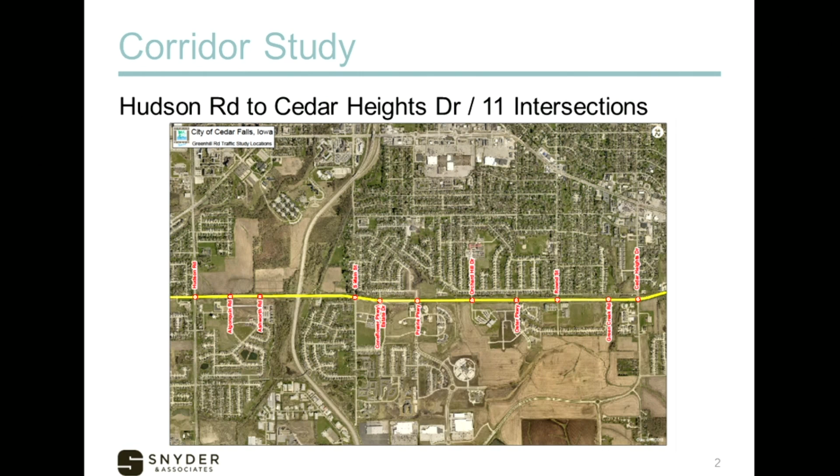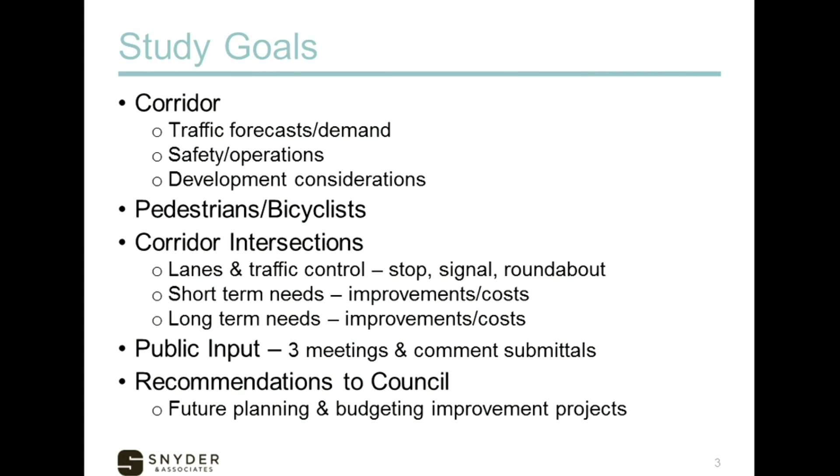Essentially some of the things John mentioned, but what we're looking at with the corridor and the goals, we're just trying to see where things are going. It's been around for quite a while, getting close to 30 years in age now, and trying to decide what the next step of evolution is for the corridor. We're looking at traffic forecasts, safety is always paramount for us, all the different modes, the complete streets, addressing any pedestrian and bicyclist needs, but also trying to give you long-term recommendations for the next steps for the corridor, to help with planning and budgeting.

Some of the main things we looked at is why are we here, why are we doing this, in the sense of community growth and the land use changes in the area. A lot of the area to the north has been there for quite some time. The area to the south is really taking off now in the Pinnacle Prairie area, and how that's impacting the way intersections function and operate for the neighbors out there.

And again, coming back to those budgeting and funding issues as we talk about what types of things are needed in the long term.

The public input process, we had a tremendous opportunity out there with 3 public meetings in which neighbors were invited in. It worked quite well. We were able to provide them with presentations at the meetings to try to give them a summary of information. It was always a lot of information, a lot to ask of everybody, like what we're doing tonight, but we gave a lot of information to them.

And then through that process, we also had open discussion at tables, large aerials, maps, things they could take a look at. We tried to get a lot of feedback and comments from them, realizing we weren't jumping out of the gate with designing anything yet. We're just really talking about what we think is needed at the intersections and how we take steps forward.

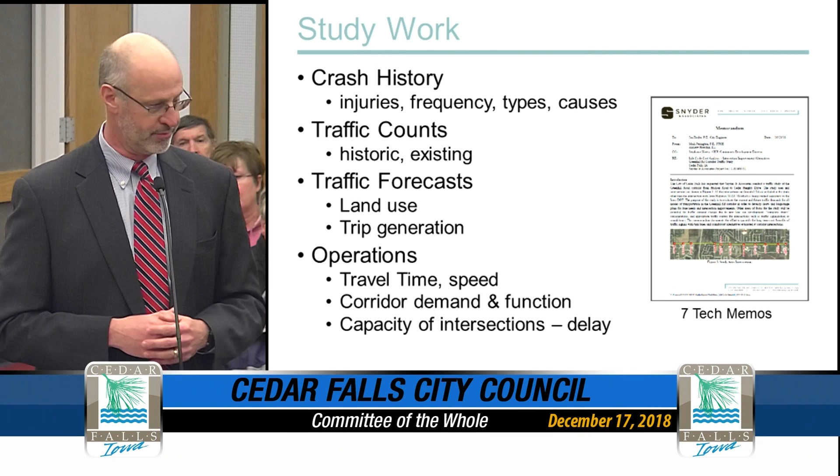Changes were made down there that I'm sure you've all driven through, with the lane elimination — you move over and you got left turn lanes in there. The good news is it was a tremendous help in that there's been 0 crashes out at Rownd since those changes were made. The trick is that's kind of an interim type improvement, because over time, as the road gets busier, having the single lane, the merging, can start to create some conflict out there.

But the key point with all of it is that there's very limited injuries, which is a very good thing — very limited number of injuries out there in the corridor, and for the most part, the rate, like I say, what's going on is fairly low.

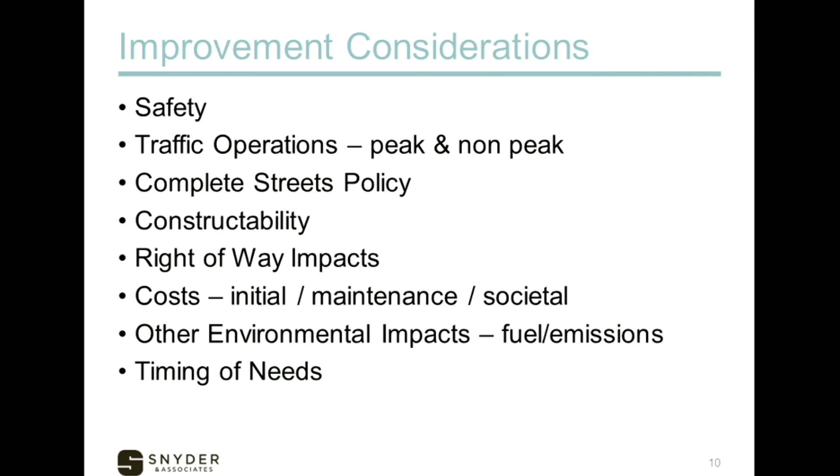When we started looking at improvements out there, number one is safety. We always want to start from that point and ask ourselves what we need to make things as safe as possible. Even though our crash rate isn't that bad, it's still a very paramount part of our decision making. Then we look at other things: traffic in the peak hour versus non-peak times, the city's adopted complete streets policy, right-of-way impacts, and costs.

A key thing we did in this study, which you've seen in some other things with university decisions, was to really try to look at more of the overall costs related to the project—not just the construction costs of an improvement at an intersection, but the costs to the public, how that intersection operates and functions over time. So we put together more of a total dollar estimate when we look at it.

And then we did put a little bit of information into it as best we could with the timing of the needs, when we thought changes might be necessary.

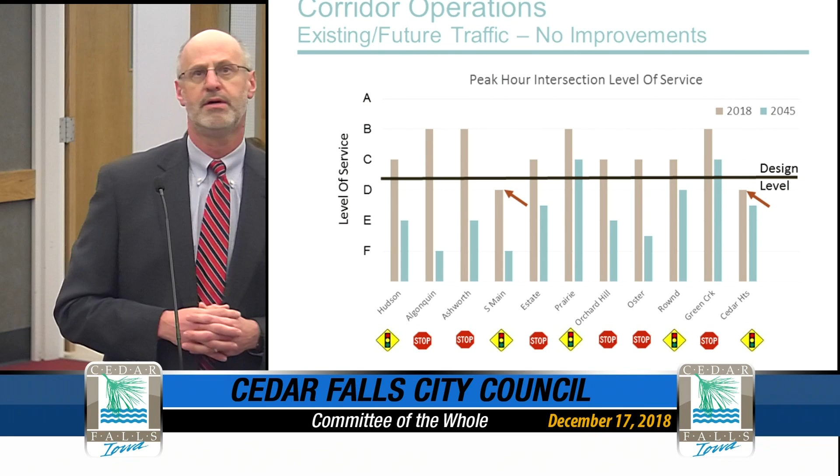So this next chart we're looking at is the corridor operations. Again, you've had us traffic folks up here before speaking to you about level of service, where we give a grade to an intersection of how it works, A to F. As you remember, A is great, F is not working well.

The black line across the middle of the chart is what we look at as that design level. D is when the volume of demand going through an intersection equals the ability of that intersection to handle it. Usually we're trying to aim for something a little bit above that when we design an intersection to operate, so that's why you see it set between D and C.

The point is you look at all the intersections across, and we put the symbol at the bottom to remind you what's a signal versus a stop sign on the side street. Looking at today's traffic, South Main and Cedar Heights tend to operate right at that point where the volume to capacity ratio is getting pretty equal—and that's during the peak hour.

It's not like that during a lot of the other hours of the day, but during that peak time—which is how a lot of the citizenry will judge some of the intersections, since those are the busiest times when people are driving through—you see two intersections that are a little below, but the others are right around that C-B area.

Now, when you look at the blue bar for each intersection, that's 2045. So that's if we generate more traffic out of all these land uses that we think are going to happen. What happens to the intersection if we don't make any changes, everything's just as it is today? How would it operate if that increased demand would occur at the intersection? As you might expect, a lot of those blue lines will go down because the demand goes way up at the intersection. And if you don't make any changes, no lanes, no signals, no roundabouts, anything, it will deteriorate.

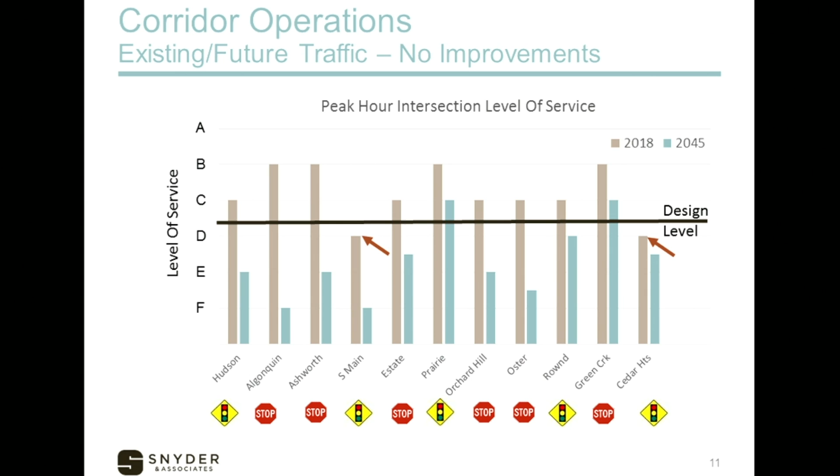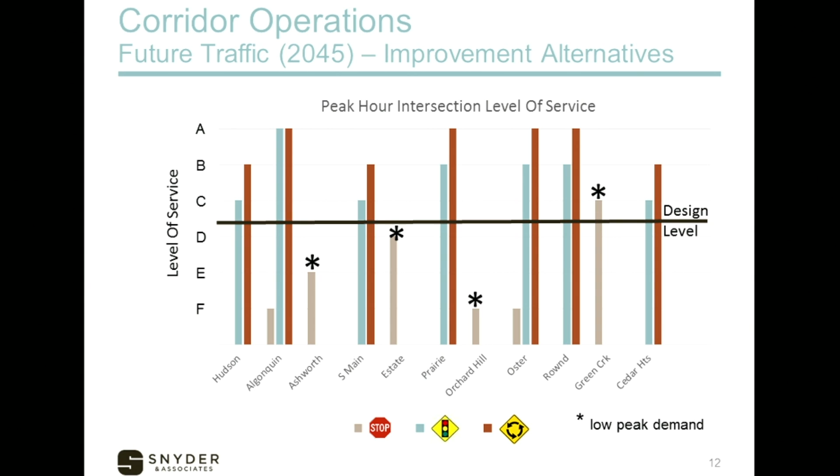As you look across, take Algonquin as an example. You see the very first one with a stop sign showing it very low. In the future, if we anticipate the hospital coming in to the north and more development to the south, if you leave it two-way stop control and add another leg to the intersection, it'll struggle a little more in how it operates. So then when you go to a signal or a roundabout, clearly it improves how it performs.

If you work all the way across the intersections, you can see comparatively how those go - South Main, Prairie, some of the ones that have signals, comparing signal versus whether a roundabout is an appropriate option for the future.

The ones I put asterisks on - Ashworth, Estate, Orchard Hill, Green Creek - those are intersections where we don't anticipate you'd need extra traffic control. Even though the performance is a little lower there, it's very typical: you have a busy arterial road, a minor side street, during that 30-40 minutes of an evening you may experience some delay. But we don't think the volume's enough to mandate putting in a traffic signal or a roundabout there. So I wanted to point those out to you.

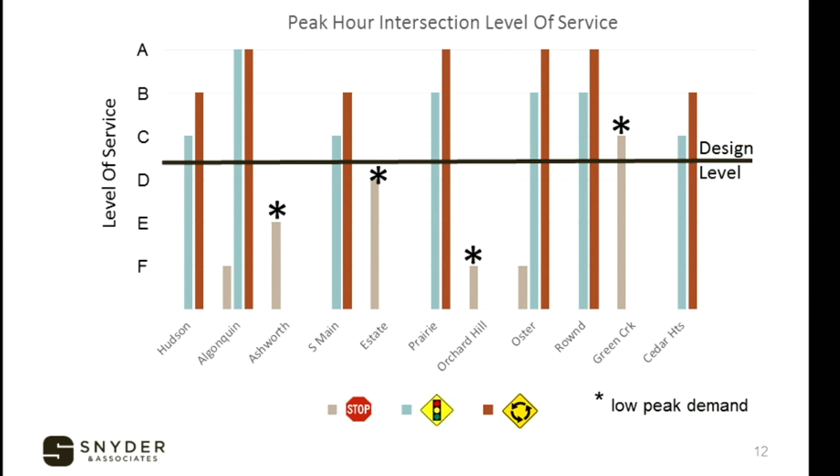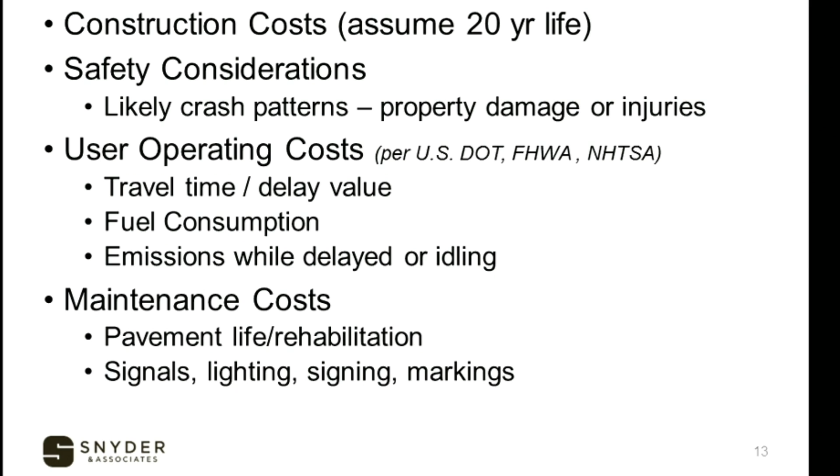We looked at these alternative benefits and costs, considering construction cost and looking at a 20-year life, typical of what we look at with the project, even though we usually hope infrastructure items last longer than that. But safety - putting a dollar loss into safety - is a way to examine that. And other user operating costs, just the travel time of drivers going through intersections. The reality is there's a dollar value to everyone driving through an intersection, whether it be goods or just a citizen traveling somewhere. We put all that together and also factored in maintenance costs for the long term, for the community taking care of the intersection. Signals don't just sit there and run on their own for 20 years - you've got to take care of them, do maintenance; roundabouts need marking, signing, things like that. So all those things factored into this cost.

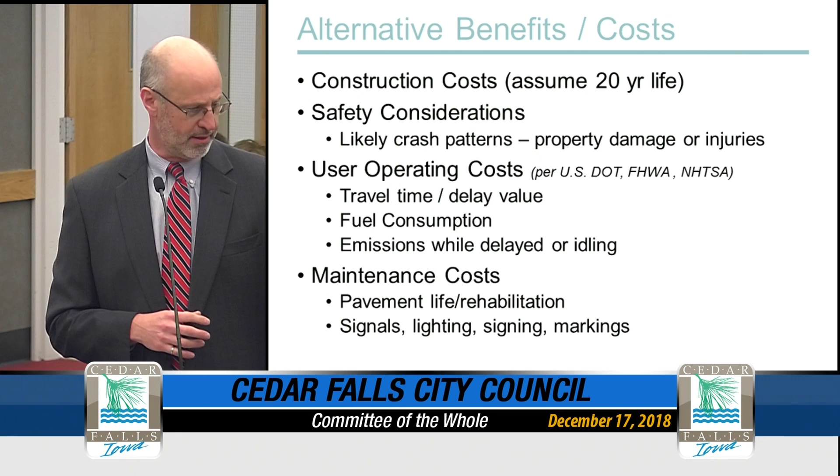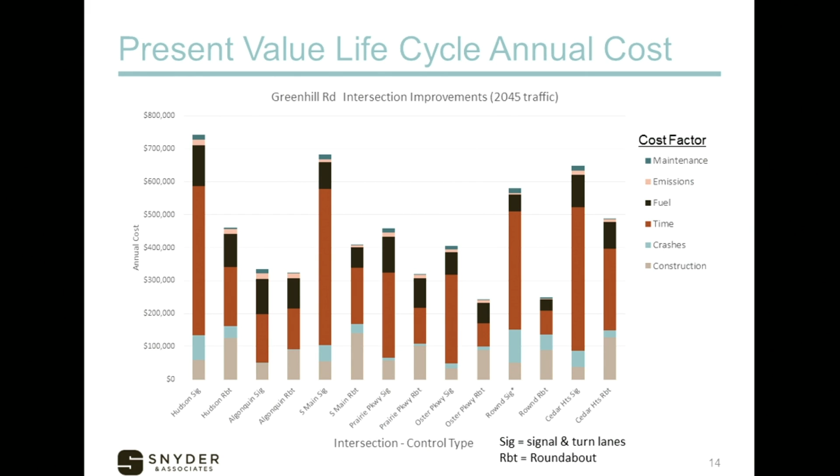Another chart for you, a lot of information here, but what you have before you is putting everything into a present value, looking at an annual cost, say $100,000 per year. What we've stacked up is all those costs I just mentioned. Starting from the bottom, you see construction in that tan color, the cost of crashes, and then the big one you'll notice on a lot of these is that travel time factor.

That time of people traveling through intersections, when you start to factor that into the peak hour, the non-peak hours, all the days of the week and so on into a year, there's a lot of time there that goes into that. Then you'll see some at the very top for fuel costs, emissions, pollutants, and the last one, maintenance.

But as you look across that graph across the bottom, you'll see a couple there together: Hudson, treated as signal, treated as roundabout. Algonquin, treated as signal, treated as roundabout. These intersections where we either have current traffic control or feel you're going to need traffic control in the future to allow people to get into Greenhill, coming in off the side street, we did this comparison of intersection improvements as alternatives to see how things stacked up. This is what staff or we refer to elsewhere as the life cycle cost analysis.

It puts everything into an annualized cost of how things stack up, because initially with a lot of these improvements, just look at that tan across the bottom, a signal versus a roundabout. The signal improvements may have a lesser cost for construction versus the roundabout, but when you look at the other costs associated with it, sometimes a signal ends up costing a little more over time than a roundabout.

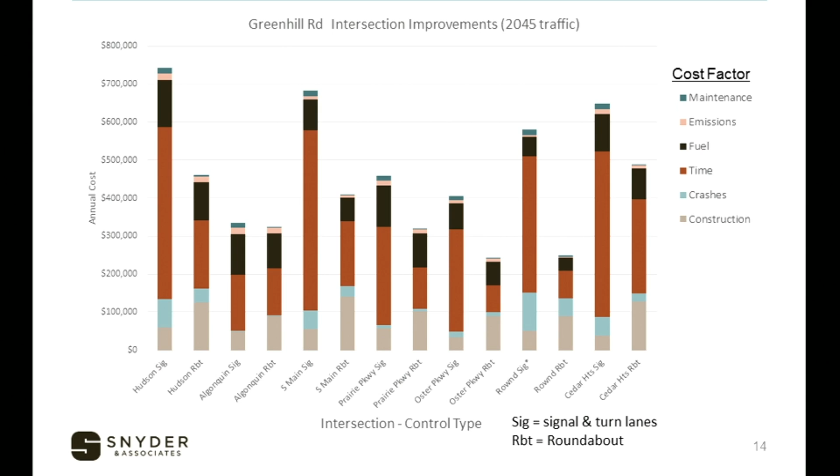So we took a look at that all the way through for all these intersections. Now we're going to walk through these and go through all of them. I'll keep moving so we have a lot of opportunity for questions and answers.

Hudson Road - it's just about safety and capacity in the future. We really feel like staying with the signal, adding turn lanes. There are some key issues in that some of the truck traffic traveling through the intersection, even though roundabouts can be designed for the negotiation of trucks, we think that's key.

The other thing we looked at a number of years ago at Hudson was the traffic associated with UNI. There's just enough special events and other things that you get surges in traffic coming through there, and in a lot of ways the signal system you have, doing more specific operations, gives some ability to more clearly get traffic through as needed.

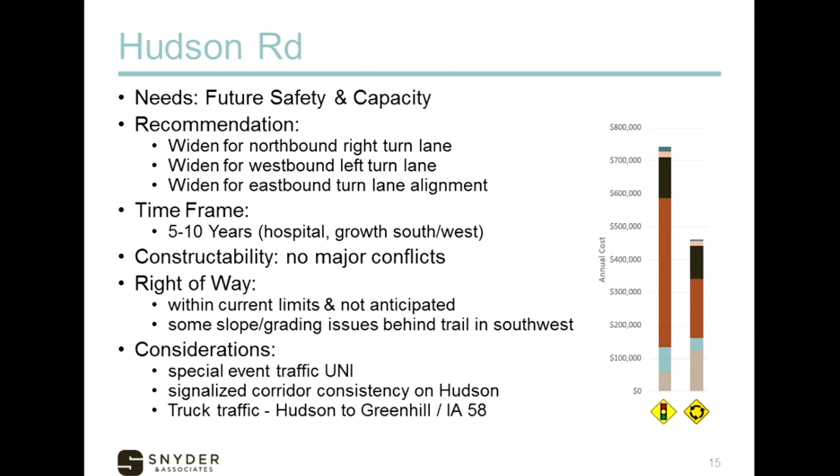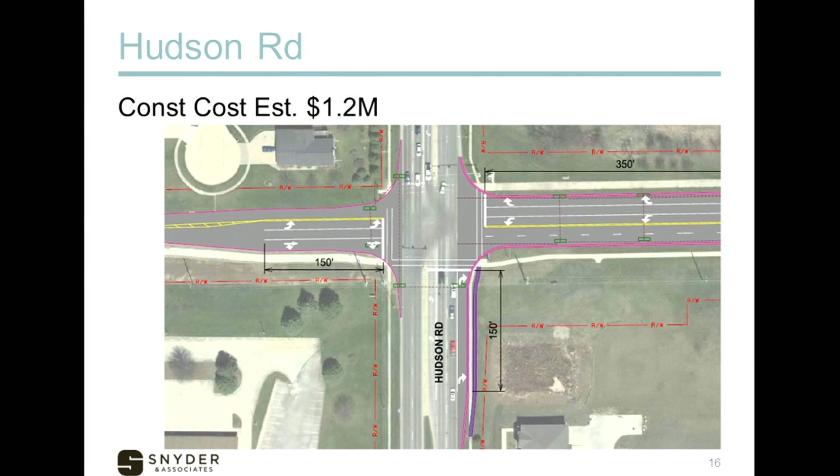So that intersection I put over there on the right is that little snippet of the bar chart I showed you a little bit ago for comparison. There's a picture of Hudson we show with the northbound right turn lane, the addition of a westbound left turn lane, and some widening on the west side to match up, so we get those lefts across from each other, which makes for safer operation.

Algonquin is kind of a toss-up between the signal and the roundabout and how they behave. We think it'll be a question of, as you look at development driven through the hospital, when that may occur, how do you add another leg to that intersection on the north side. It'll change how it operates, and we think a signal would be a simple solution there and could work fine when the time actually comes.

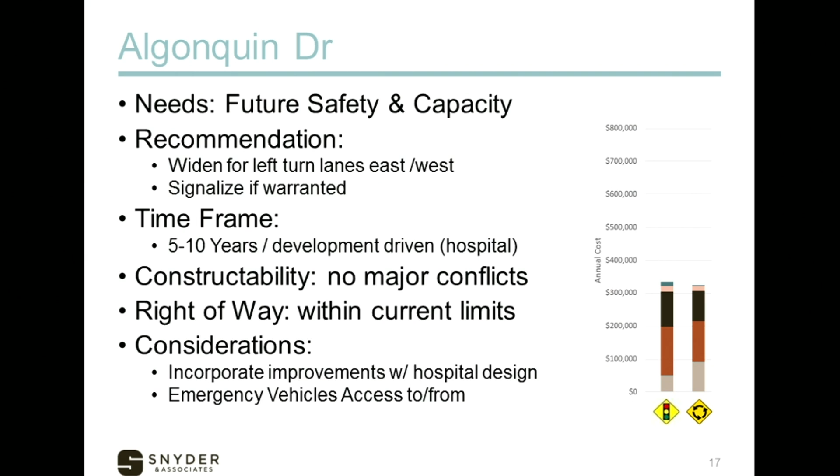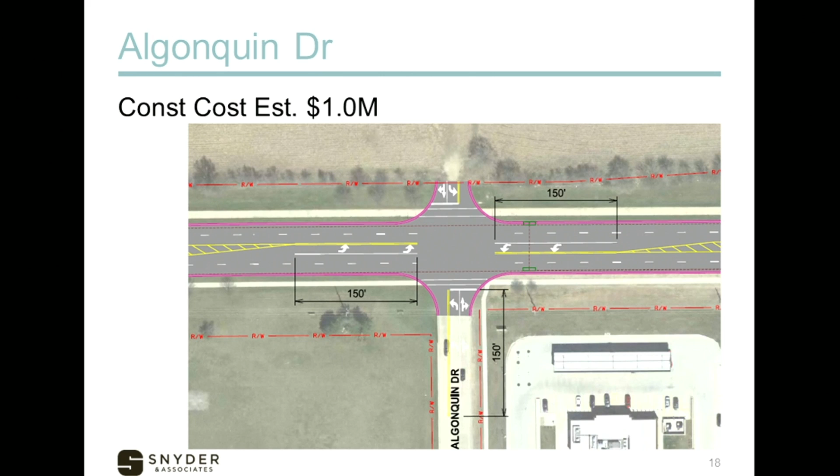So there you see Algonquin - visualize Greenhill being just a basic four lanes, adding in left turn lanes out there on Greenhill, and then signalize if warranted.

Ashworth is really very similar. You get to the point where traffic grows enough on Greenhill that over time you need to consider adding left turn lanes out there. Really that would just be a continuation of the left turn lane from Hudson - you carry it eastward through these intersections, because even though there's a pretty good distance between them, by the time you'd taper down and taper back out, you'd just be better to widen it all the way through.

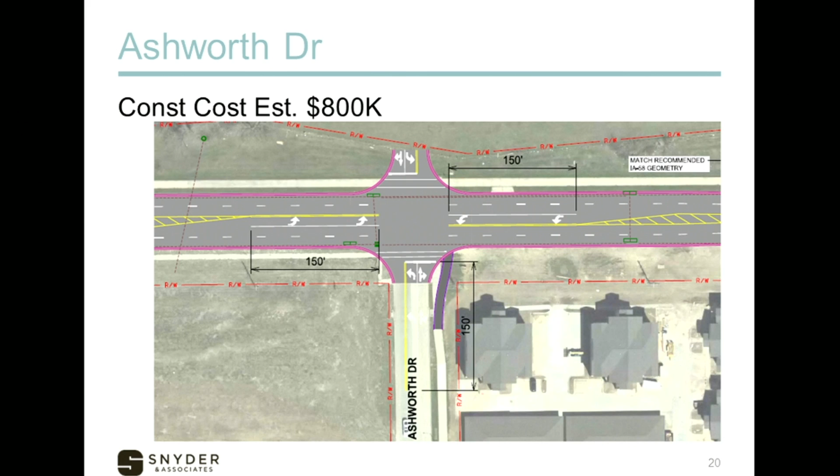Okay, South Main Street, so we jump over 58. We just wanted to remind you that there was some interim work done there. That's kind of what precipitated a lot of conversations at the first meeting, the concerns that there had been a lot of diversion traffic coming out of the 58 and Viking construction. So some things were done there to add some arrows for turning. It was just getting to the point of additional traffic, difficult for people to get left turns made.

Those things were done by the city at the intersection, kind of in the middle of the study, early on. No change in geometry, just a change in how the signal worked, but it did help things. On the other side though, by adding those arrows, it took away from our 60 seconds in a minute as we divide up that green time out there. So it can also start to lead to other delays, like for the westbound traffic where there's only a single through lane, because people have to wait a little longer now to bring up an arrow from another direction. It's these things where we squeeze in one direction, but then something's got to give in the other direction. So some increases in delay out there with it.

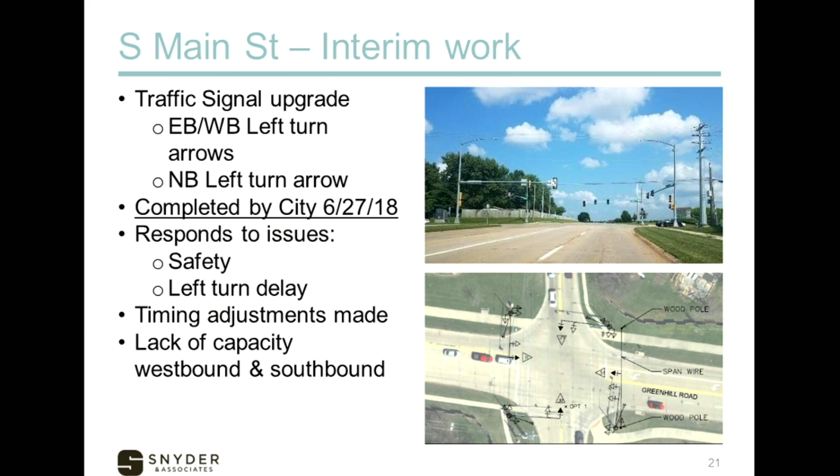So then you look at South Main Street, though, talking more longer term. We look at that, we see the comparisons of the two of how they operate, one signal versus a roundabout, and the costs. Key in there, I would note there's some constructability issues to it.

There's a lot of utilities that are very obvious, above ground, you see them when you're out there, large utility poles. There's a lot of different communications that run through that corridor. There's just a lot of things that over time have been put in that corridor in a north-south direction. But there would also need to be some right-of-way that would be associated with the roundabout.

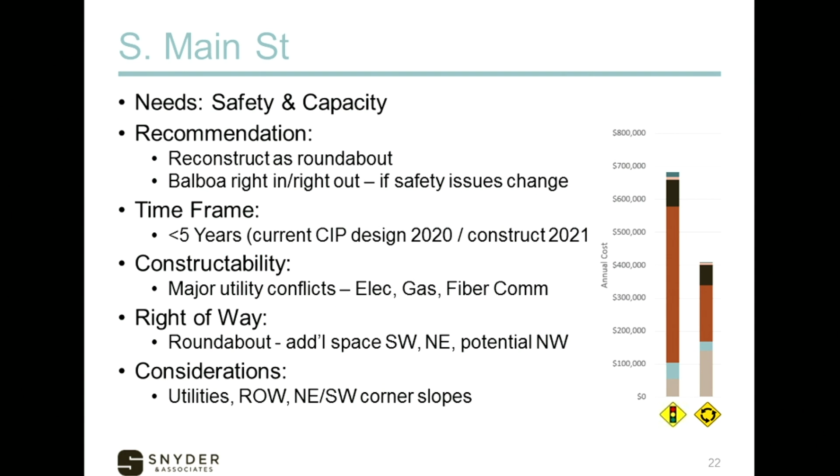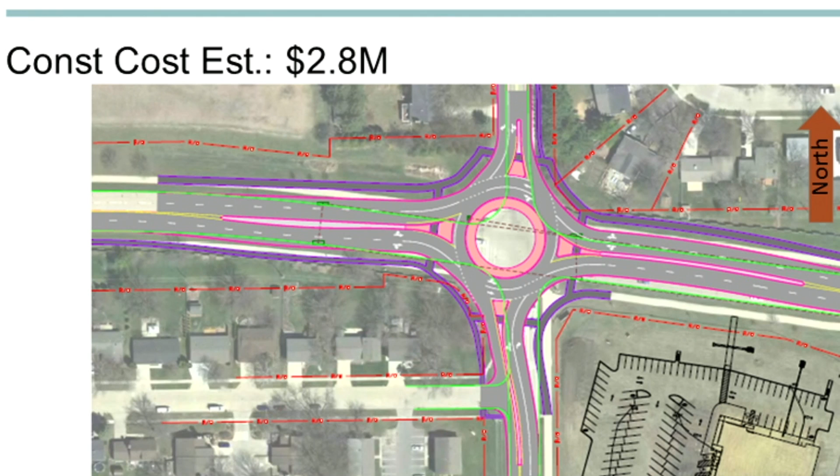Certainly in that northeast corner, there's also a grade change as well. If you can visualize it out there, the fencing sits up quite a ways from the intersection, probably my eye height, 5-6 feet. So that would also be an interesting challenge in what's there. But that shows you how the roundabout really, if you focus on the green lines, those are actually the existing pavement curbs out there. So it gives you an idea, and you've all experienced this with University as you've seen that corridor change, of the different kind of footprint you get at an intersection when you go from a signal to a roundabout.

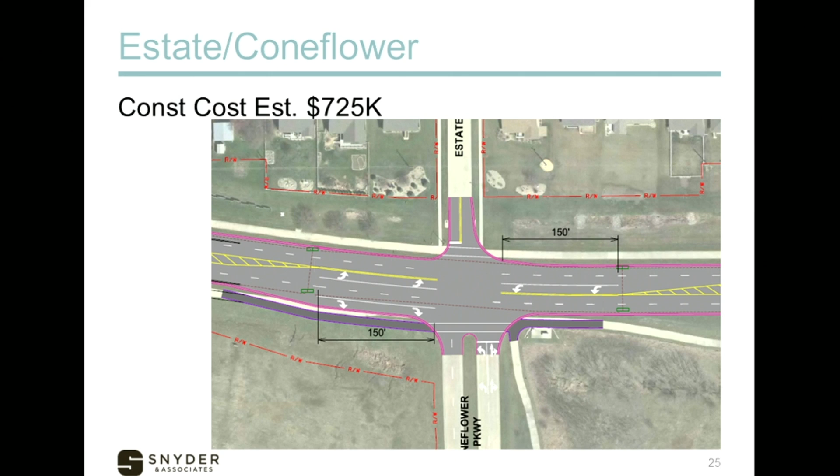Estate and Coneflower, again, not as many things there that are needed, really just looking at long-term, some turn lanes, east-west. Don't think the need will be there for signalization in what we see in the way it operates, nor adding future traffic to it. But again, you get back to that 4-lane of Green Hill, turns into more of a 5-lane with left turn lanes in the center part.

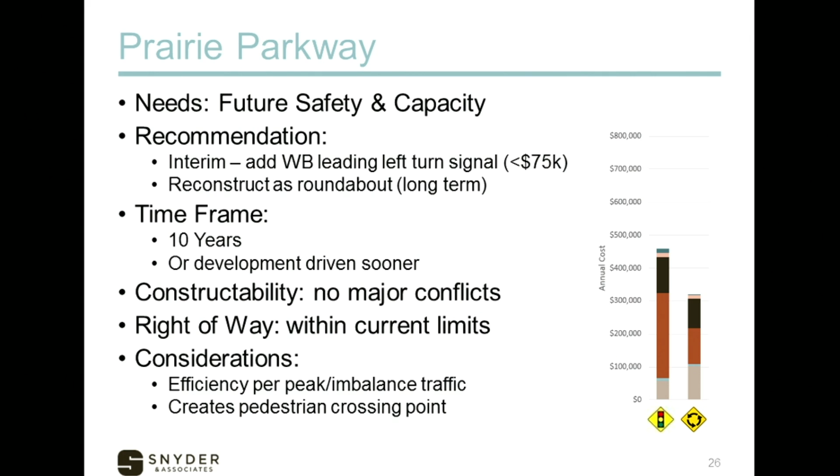Prairie, again, it's kind of one of these safety and capacity things. You've got the 4 lanes out there, left turning traffic is increasing a lot. If you'll notice in the recommendation, we do have an interim recommendation there talking about what we call a leading left turn signal, that without adding any physical pavement, any turn lane, the ability is there because there's definitely a greater demand. There's well over, I think it's over 120 an hour now, over several hours of the day turning left, and they have enough conflict coming at them, it can get kind of difficult.

So we think there could be some gain in safety out there by introducing the left arrow that would come up for those folks if they get queued up on the one side trying to turn onto Prairie Parkway. Very little opposition from the other direction. Again, that's an interim thing, kind of like South Main. It's something that can be done with the signal with not a tremendous investment, but a little bit of safety benefit in how it operates, or just take some delay away for folks.

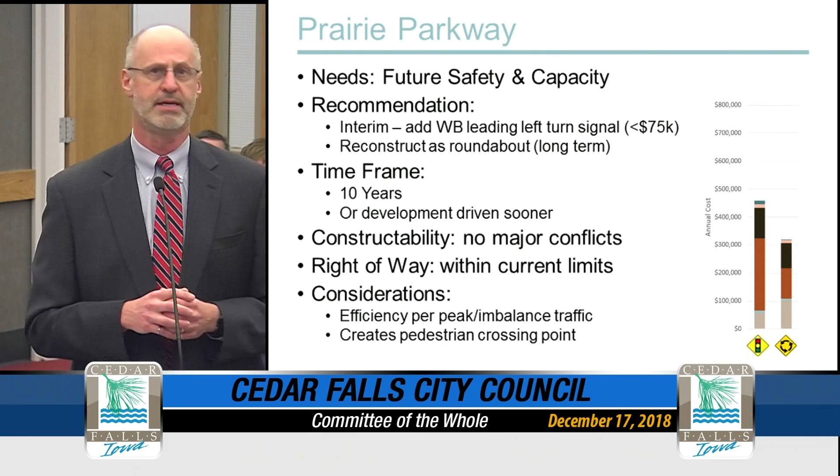Prairie long-term, we think, again, is another intersection that can have some advantages working as a roundabout. It's got a lot of peak demand, especially to the south coming out of Pinnacle Prairie. So it's one of those where you get a lot of hours where signalization isn't quite as necessary, but during peak times you need to handle things. That's one of the nice aspects of a roundabout - it can keep everybody moving during off times when you don't need to totally stop one direction, but then handle things when you need to during the peak.

As we move on through the corridor, one of the nice parts about Green Hill as we move to the east is the wide open right-of-way through there. Doesn't mean you want to tear all that up, but it's an aspect of the corridor that, way back when, the vision of gaining all that right-of-way as they built the corridor gives us a lot of latitude to do things in there, and still have the features of the trail and all the pedestrian aspects that make it kind of nice.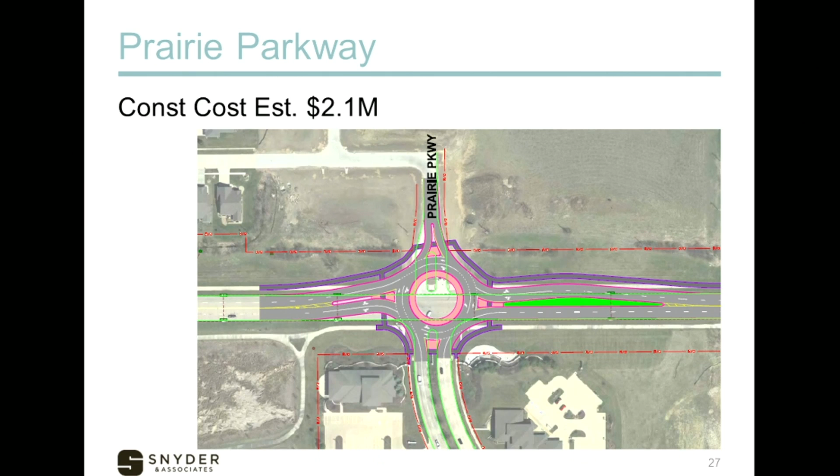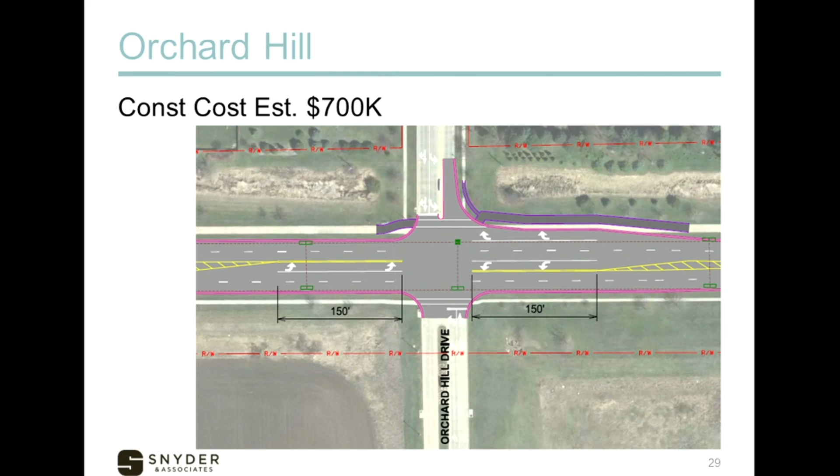Orchard Hill, long-term, we don't see as many things there of need - basically turn lanes over time, the same function of waiting to make that left turn out on Greenhill. You start to get to where you're hanging out in the road while somebody else is driving in a through lane. So we create those turn lanes to get people out of the way, really for safety more than anything. But we don't believe signalization will be needed there. To the south, the drive goes into the church, and as we understand that's the end of it - won't be mixing on down as another street. To the north, there are other avenues to get to signals if needed, or if they become roundabouts, other ways to get out onto the corridor.

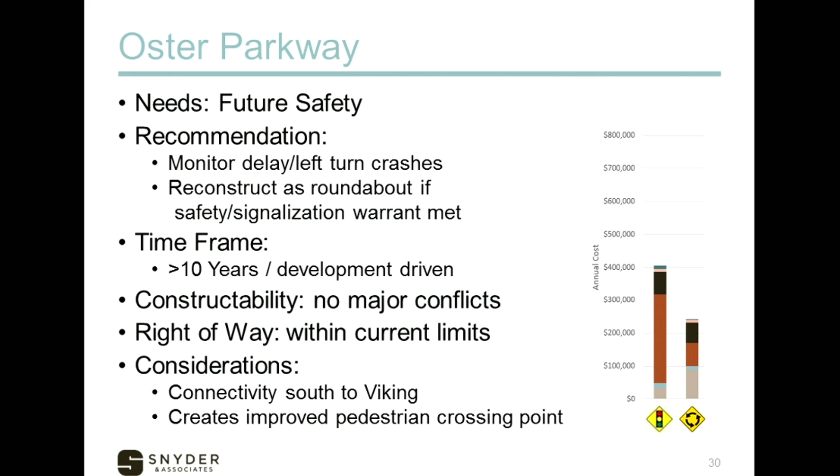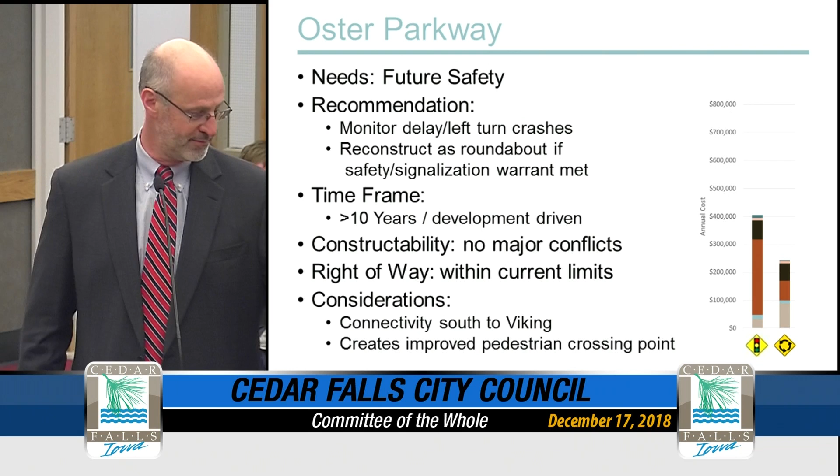Oster - future safety is probably what we foresee there more than anything. It'll be difficult as traffic gets busier on the corridor to get out. Oster's got the potential to grow to the south as it goes down through the Pinnacle Prairie area, so you've got that opportunity where more traffic's probably going to be introduced to the situation. So the thing for you to consider is really the idea of needing some sort of traffic control longer term.

And again, we've come around - you're seeing kind of a consistent theme here as we talk about it - but we believe that by the time you start looking at doing turn lane signalization, looking at those costs and contemplations, a roundabout may be as effective.

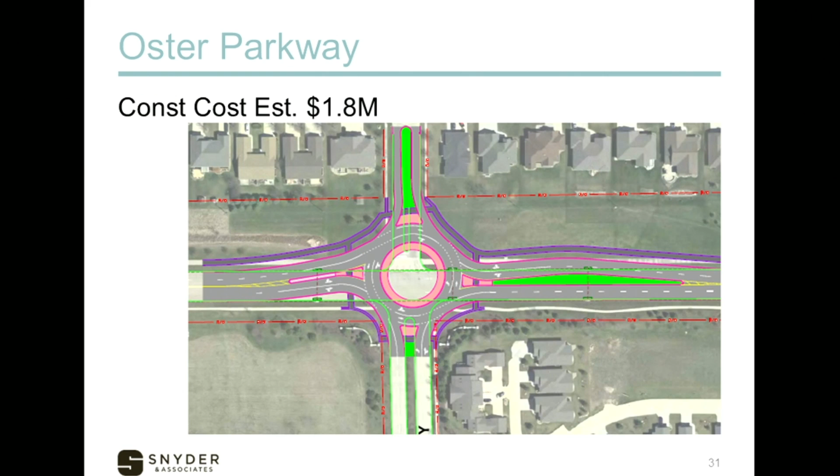The other thing we didn't really mention is something we did do in this, was we tried to look at the pavement. The reality is that pavement's approaching 30 years old. On the other hand, it's actually performing pretty well out there. Down by Cedar Heights, it's definitely got more problems with raveling and failure, just starting to go. But through some of these other intersections, it's performed well. As we look at these recommendations, some of these we could still be talking - it might be another 10 years or farther out. So knowing that pavement's going to just continue to decline over time, at some point there will be patching efforts and other things done, so those costs are factored in.

Rownd - again, safety and capacity. The signal was added several years ago, and that started probably from a standpoint of, gosh, it was kind of hard to get out there, and you're starting to see some things, maybe crashes from the side street, difficulty getting out, so signalization was added. Then what that did was - you signalize a 4-lane, sometimes you have that problem with when you put signals on a 4-lane - that left turn crash started to develop out on the main line. Again, the reaction was made to that, the merging with the traffic that's out on Greenhill today. It works, but over time, with the speed through there and as the volume comes up, all that merging down to a single lane won't be as efficient as you'd like it to be to carry things.

So long-term, again, you keep an eye on that, see how it's doing, how it's behaving and performing. And if you notice the time frame specifically on this one, we said we think it could be another 10 years out.

It could be some time. So it's not that the investment of infrastructure and things that were done was a very short-term thing that was of no use. It's still going to perform and do what it needs to do.

Again, Rownd, like Oster, you've got that connectivity issue where it's going to become a little more continuous. It's somewhat of a collector-through street going northward. It's going to have that same type of thing down in the Pinnacle Prairie area, connecting down eventually to Viking in that area. So again, you've got the potential for it being more of a through street.

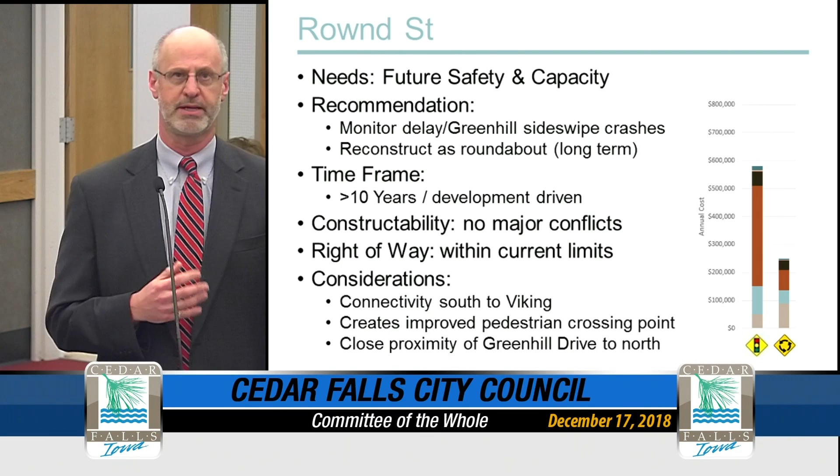Again, I'd point back to, as I've been going through these, we have those chart comparisons in there of signal versus roundabout and that annualized cost we put together.

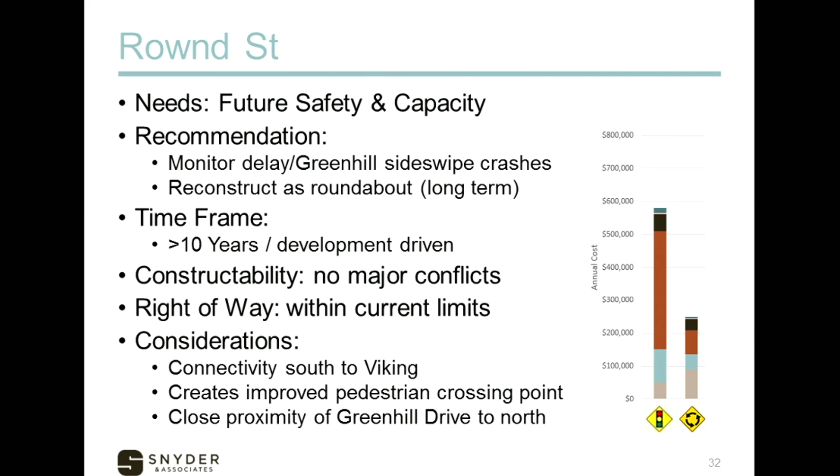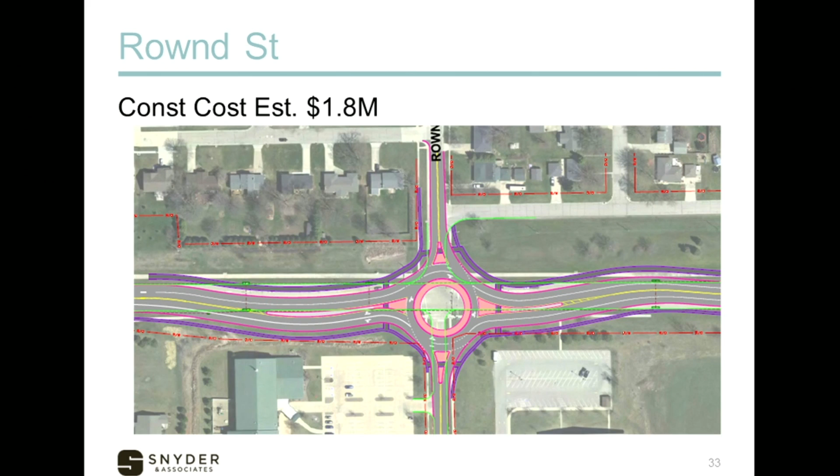So we're trying to shift from that. We don't have the right-of-way as much to the south, but the areas, you look at the churches that are down there and their parking lots the way they are, at least it would appear it's not areas of significant usage as far as those corners. Not trying to belittle that right-of-way, but that's just kind of the reality of how it's being used and what's out there.

A couple more. Green Creek. Again, fairly simple intersection, really fairly simple there. It's keeping an eye on safety and just making sure - it's a T, talking through with staff and everything we've kind of looked at. There's no real thought process that there's going to be another leg to that intersection to the north to just connect it up to Green Hill Drive. So it'll probably just stay this T intersection.

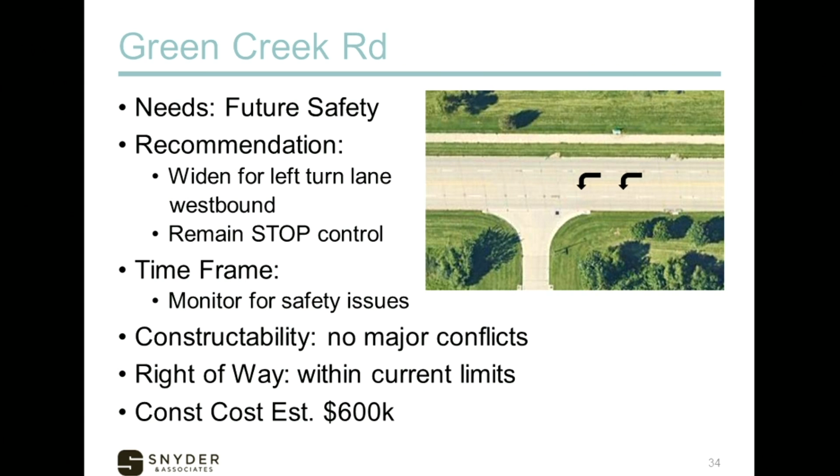Development off of it is kind of limited. It becomes that function over time of someone waiting to turn left in because of Green Hill traffic. Again, as a left turner, you're stopped sitting in that through lane where somebody else might be coming along. And unfortunately, we continue to deal with distracted drivers and issues related to that. So that'll just be a safety monitoring issue.

Lastly, Cedar Heights. Again, a lot of things there - safety, the capacity and how it operates, maintenance. As we said, some of that concrete is starting to fail out there. It's not performing quite as well over time, so it's getting to the point of needing to repair good portions of that intersection. So again, that one, the split phase signal - I've stood up here and talked to you about split phase signals before in some other corridors. They serve a function in the short term of definitely making a difference as far as safety, but they have their downside of being very inefficient.

And so it's trying to decide in there when to make those changes. So we recommend removing that split phase and then consider reconstruction of it as a roundabout. I know part of it was in the CIP looking at really Cedar Heights, I believe, from there a little further south and the widening and everything there. But this may be the opportunity to do a project with that.

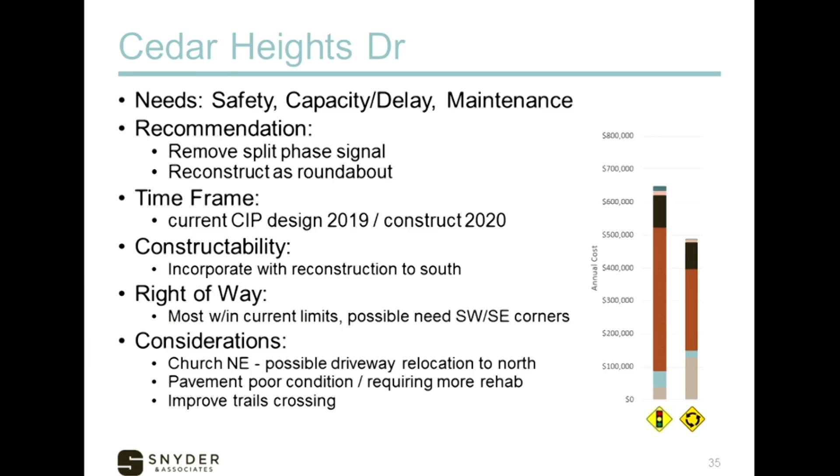The good news is when you look at it, again, we're fortunate in that you've got a pretty wide open intersection as far as the land use, and really even the closest driveway - the church in the northeast corner has that driveway that comes down - but there might be some opportunity there, we think it's enough of an impact, to just flip that driveway to the north to the other side of the parking lot as a possibility if needed. But there you see the layout of Cedar Heights.

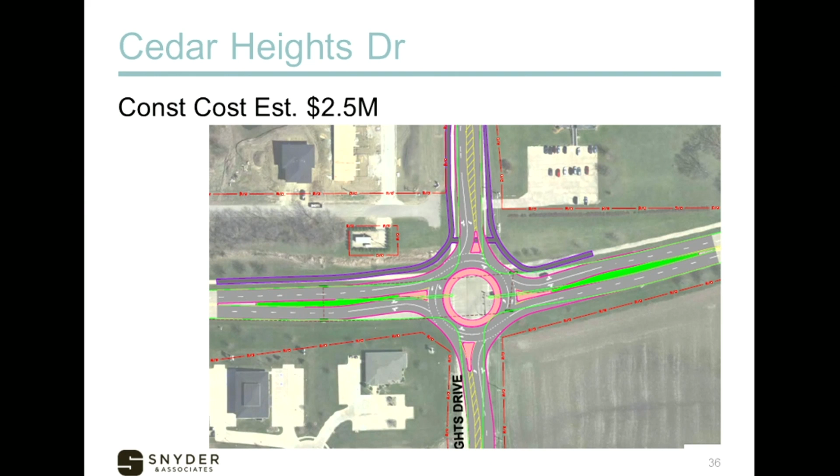Again, a lot of pavement repair going in with that one eventually, so that's kind of that trade-off when you do look at the roundabout. It's envisioning, again, you envision University and what you've just worked through on that. You have a lot of that pavement where you've got to reconstruct in order to get the proper alignment and everything, but again, some of that pavement is reaching its life. So that walks you through a lot of it.

Pedestrians, bicyclists, just wanted to make sure you knew that was an important part of what we looked at too. We've got a lot of unique opportunities out there in that corridor because of the nice trail system, all the sidewalk that's out there. There's a lot of good things already in place, and good separation from the road, so we really see things working pretty well out there.

You know, bicyclists being heads up with drivers and vice versa, paying attention as they go through a corridor like that. It's nice, and it lends itself to getting going on a trail like that because you don't have a lot of other driveways and other conflicts. The intersections are farther apart, but it's kind of that people forget. Cars forget to look for bikes, and bikes forget to look for cars. But overall, things pretty good.

There are some things with the signals, updating the push buttons, the displays, the countdown timers, things of that nature that you're seeing more. These are a little more minor things that can be done, but we heard a lot of feedback from folks about getting across intersections. We provided a lot of timing information for the staff and some technical memos about things we thought would be logical to update.

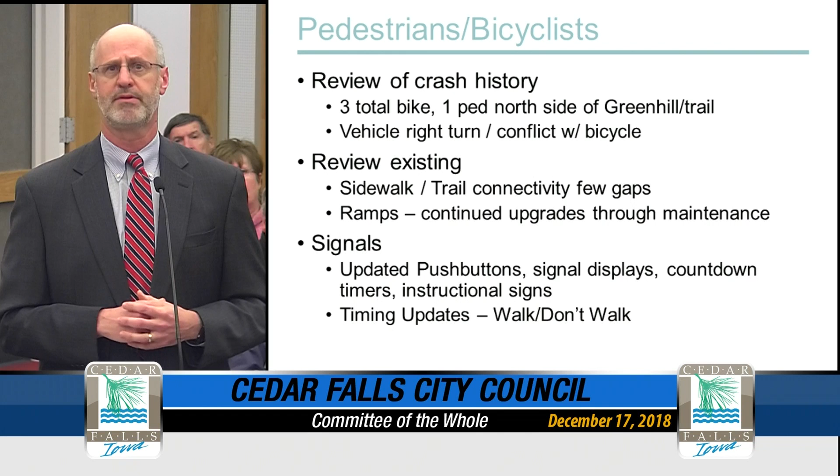So with that, done a lot of talking. I promised Stephanie I'd keep it to 35 minutes, and I think I've done that, at least this far. So I'm here to try to help answer any questions. It's a lot of information, I know. But overall, trying to kind of set a vision. When we started this, it was talking about setting a vision for the future of what to do with the intersections as more things start to occur at them, and well, what's the next step?

I would love to take this opportunity to compliment the public we dealt with out there. It was a very nice opportunity to have public meetings and have people have a lot of good conversation. There would be things you may disagree on about what we were suggesting or recommending, but people were great at all the meetings sharing their thoughts and comments. They sent a lot of emails to John and Stephanie, put handwritten comments in the boxes we provided, and it was nice to have a lot of meetings that went pretty long. We were in there for a while, but it was a lot of good, healthy conversation. So I do want to compliment all the neighbors out there - we all have our different reasons for why we believe in one thing or the other, but it was nice to be able to work with them. Very good, thank you.

Open up to council. Questions for Mark? Mr. Whelan? I have a couple of questions for you.

One is looking at the Green Hill South Main roundabout. If you look at the roundabout, there's what's called an extended median that blocks people from Balboa turning north. If you look at the signalized intersection, there's no extended median, so people from Balboa can turn north and go into town. The argument came forward from one of the citizens that there's also an example at Boulder and University where Boulder had an extended median that kept people from turning toward Boulder, and that was dropped before the final plan was laid. So you have two examples of where that extended median shouldn't be needed. In the case of a signalized intersection, I would think you need an extended median more because of queuing - traffic piles up, but with a roundabout, traffic flows smoothly. So you don't tend to get the bunches going out all at once, except maybe at quitting time. But the question is, can we reduce that extended median like we did on Boulder? It certainly seems like a good idea to me.

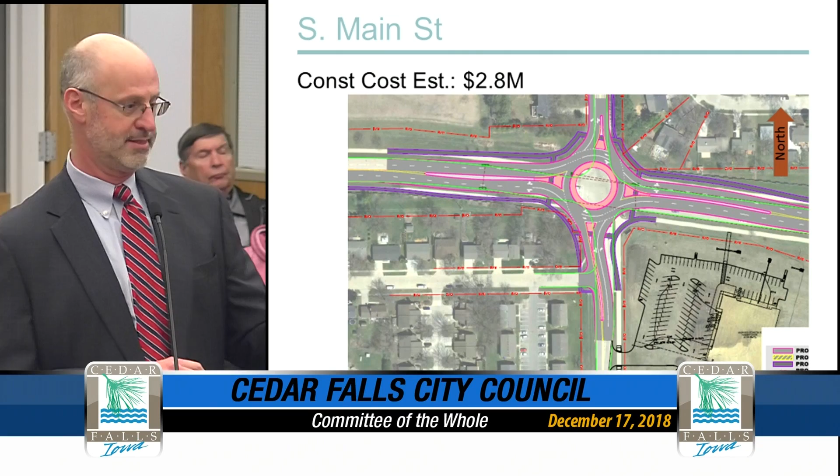Usually when we go into these at the start, we try to pick what we think is best, based on the simple layout of it, looking at the features that are out there, before we get the final information on survey, utilities, and other things that might have to be avoided. There's opportunities for this roundabout to shrink a little bit, and some things could be moved with it. So this drawing you have before you is to give you the idea of the basic shape and footprint, but by no means is it the final staking of where you'd start building one. So there's opportunity for some fine tuning of how it would sit in the crosshairs of the intersection. Yes, thank you.

Anyone further? Sue? I guess I want a little more commitment there, that regardless of the intersection on South Main, that Balboa, which has not had accidents currently, needs to remain open.

You were worried about emissions and time, yet if you make it a right-in, right-out only, all traffic's either got to go way out of their way on Cordoba or turn and go south several blocks to turn around, which is emissions, gas, waste of time. So I want to know everything we can do to keep Balboa open.

Sure, and I think it goes back to considering it for a safety consideration, and Councilman Whelan's comment of, can you add and change something later if something starts to happen?

That's the thing, if you design it upright with room out there to make an adaptation later, that is a possibility. And I know another thing that was important to the residents was to keep the sound barrier fence. Have you incorporated that into this plan?

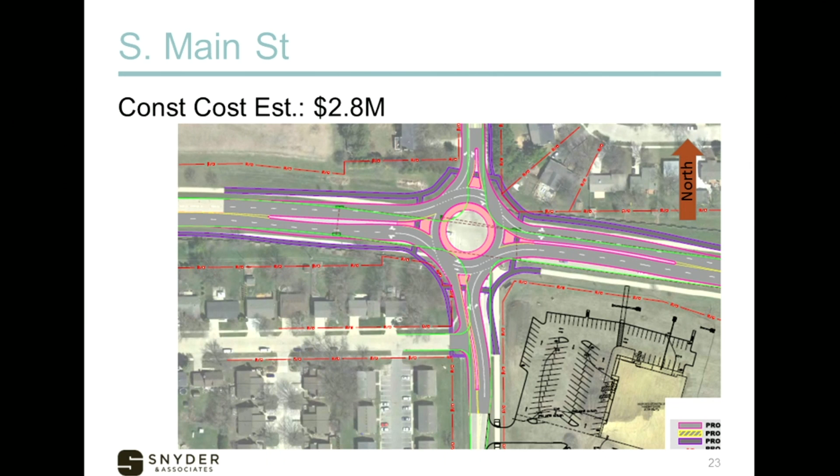We didn't get into the specifics of the fence and looking at that. It sits back towards the right-of-way line, so it'd be a consideration of how that would stay put. Any updates on that? I would just say that we did include funding in the next CIP that's awaiting approval to do work on that fencing. So that is not part of their design, it would be incorporated into the next phase of the actual design work, but we've tried to put money in there and budget for restoring or reconstructing that sound wall.

Anything further from council right now? Mr. Frank? I just want to add, I support what Dave was talking about as far as Green Hill, the southwest, if we could move that roundabout a little bit, and it sounds like there's still planning that can be done around that, so I appreciate you being open to that intersection.

I've got a question for Ron or Stephanie or John, somebody - Cedar Heights, when we rebuild Cedar Heights South sometime in the near future, will there be, unrelated to this, bicycle accommodations or any adding of a sidewalk on Cedar Heights going south? We'll be looking at all of that in the design. We're looking to get a contract for design probably in another month or two so that we can start working on that, because it didn't look like on that roundabout there was really any access to the south.

But I want to thank you guys for doing such a great job and having the public meetings open and getting all the feedback. It looks like an exciting project. Anything further from council?

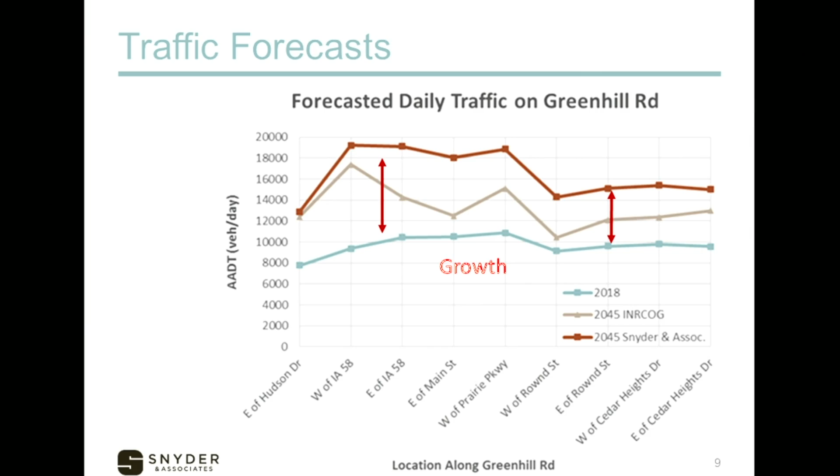Anything further from council? Be happy to welcome folks here with public comment, just to keep it under 5 minutes as always, but you're welcome to come up.

Good evening, my name is Penny Pop. I live at 4805 South Main. Imagine back to 1985 - different folks occupied those chairs here in this chamber. Neighbors gathered together to form the Green Hill Road Citizens Committee. The project became reality with the cooperation of all. The Citizens Committee and our city government and staff worked together to envision a new corridor to service the growing city they called home. The vision that became Green Hill Corridor has served us well.

New developments rose around the corridor, set back far enough to maintain the green belt. Trails were added and maintained. The pavement itself has far outlasted the projected life. A great testament to this project is the number of our neighbors who would stay in their homes 20, 30, and even 40 years, and yes, even original members of the Green Hill Road Citizens Committee. Tonight we've heard the recommendations for an updated Green Hill Corridor.

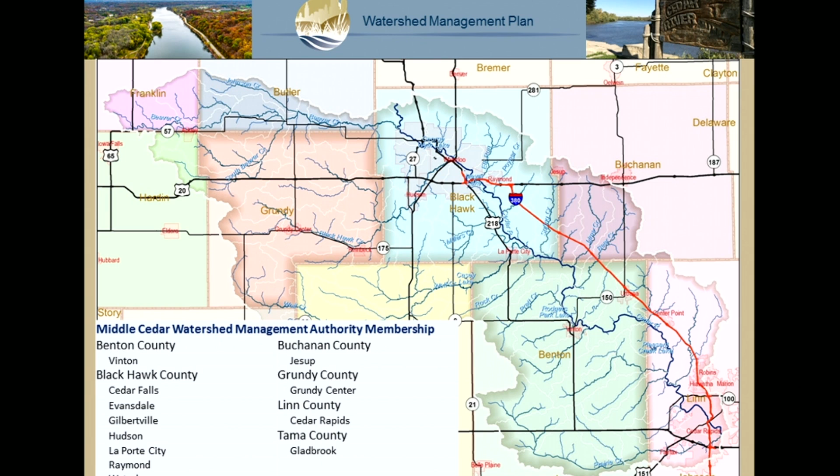Going through the watershed management planning process, you've all been involved in other planning efforts, and it's like no other—it's like all others. It starts with an issues identification phase, where we look at the problems, the issues, the concerns within that watershed, go through an establishment of goals setting, and then develop actions to meet those goals.

In watershed management planning, it's very important to be built on a strong technical foundation. So we start off with an assessment of the watershed. We look at flooding. You guys are very familiar with the flooding that occurs along the Cedar River, but we also have flooding on many of the tributaries, including Beaver Creek and Black Hawk Creek that flow into town. So we look at flooding losses, losses per acre, losses per capita, and assemble all this information across the watershed.

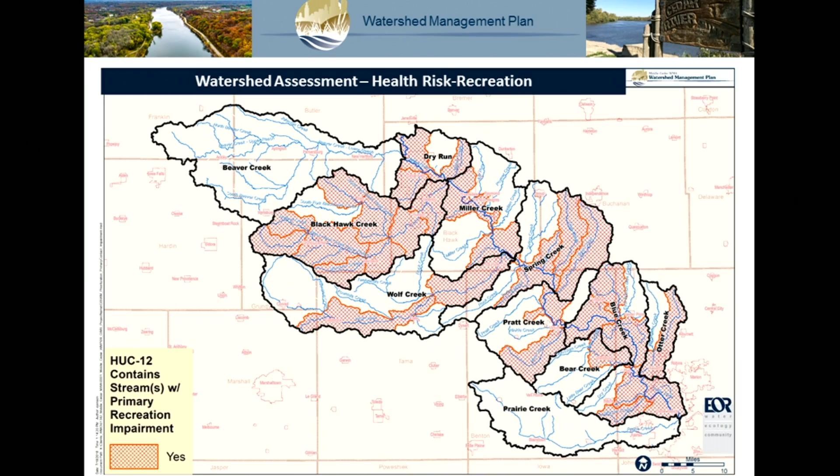We look at water quality. We're all familiar with the water quality issues in the Gulf of Mexico, the hypoxia, the dead zone. We also have water quality issues closer to home. We have drinking water impairments in the Cedar River down in Cedar Rapids, and various impairments throughout the watershed as well. Many of our smaller streams have elevated bacteria concentrations that make it unsafe for swimming and even wading. So we've got primary recreation impairments on some of our smaller streams, which coincides with some of the streams that are more actively used.

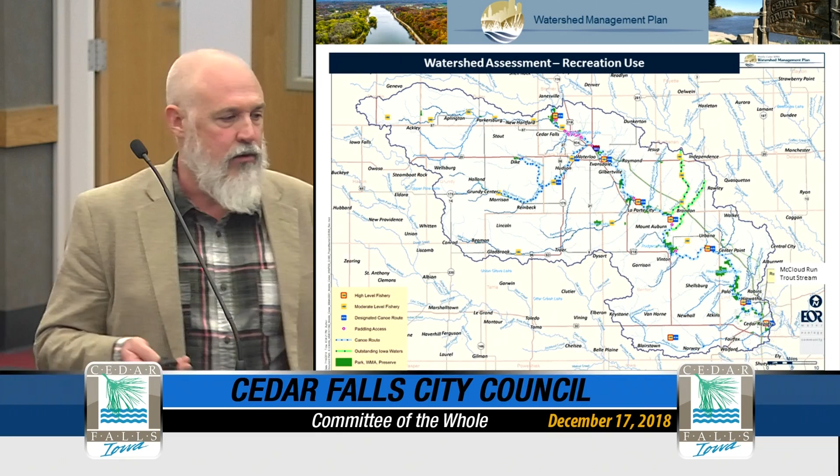So we've got recreational opportunities throughout the watershed, areas where people are canoeing, they're paddling, they're wading, they're expecting to be able to use those streams without concern for health concerns.

We've got, in addition to surface water issues, issues with our drinking water. In this watershed, as is the case with many areas within the state of Iowa, our drinking water supplies are very heavily influenced by that surface water. There's a really tight connection between the surface water quality and the concentrations of nitrates within the drinking water supply. I'm sure you're very familiar with these issues as well.

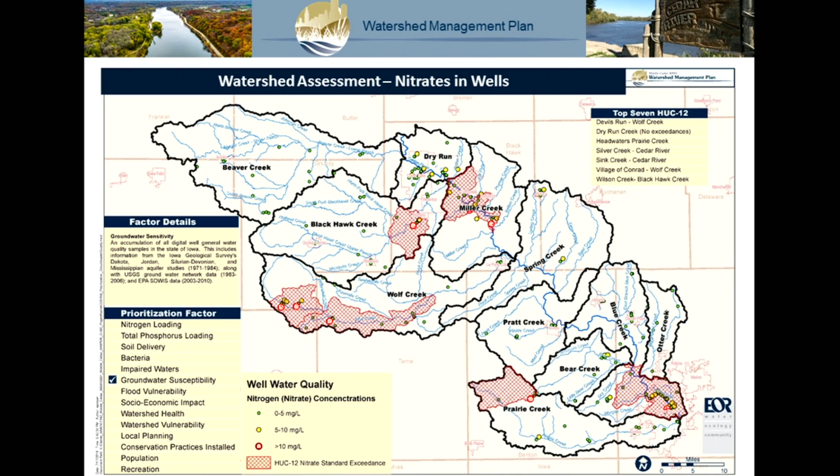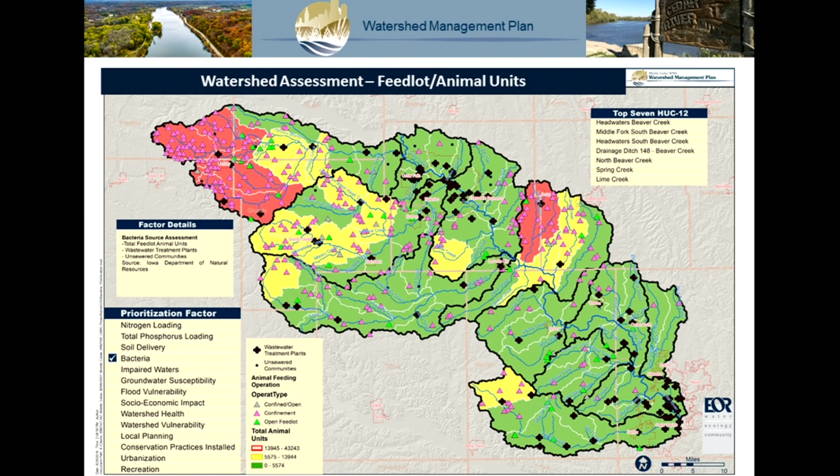In addition to looking at the quality and character of the resources within the watershed, we perform what we refer to as a pollutant source assessment. We look at where are these hot spots in terms of where nitrogen is being produced, where phosphorus is being generated, and where bacteria is being generated throughout the watershed. We gather all this information together as a way of identifying hotspots of where we should be looking at future improvements, where we should be targeting these conservation practices.

I'll go through very briefly. We summarize, we work on a watershed scale, but when we get to implementation, it's important to do it at a much smaller scale. So we look at these HUC-12 subwatersheds. In the case of this area, let's take, for example, this Headwaters Beaver Creek subwatershed to the west. We summarize the information there.

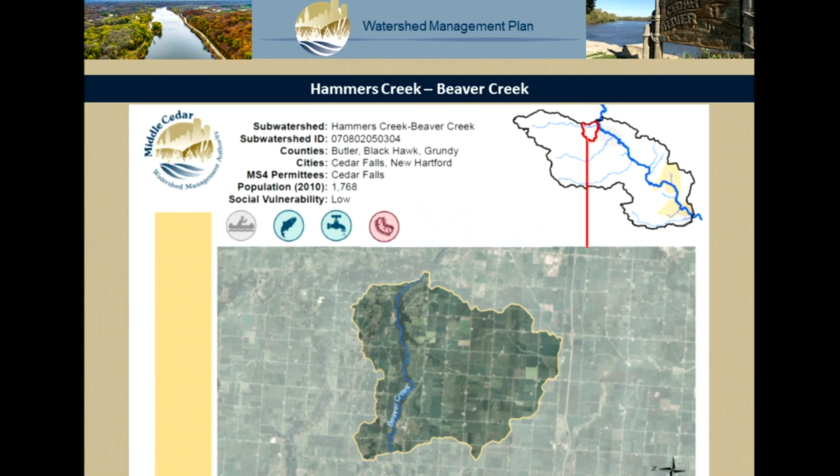What are the impairments? What are the social vulnerabilities? What are the drinking water issues? What are the bacteria issues? We summarize all that information at that HUC-12 scale. This is kind of the summary of what our watershed assessment looked at.

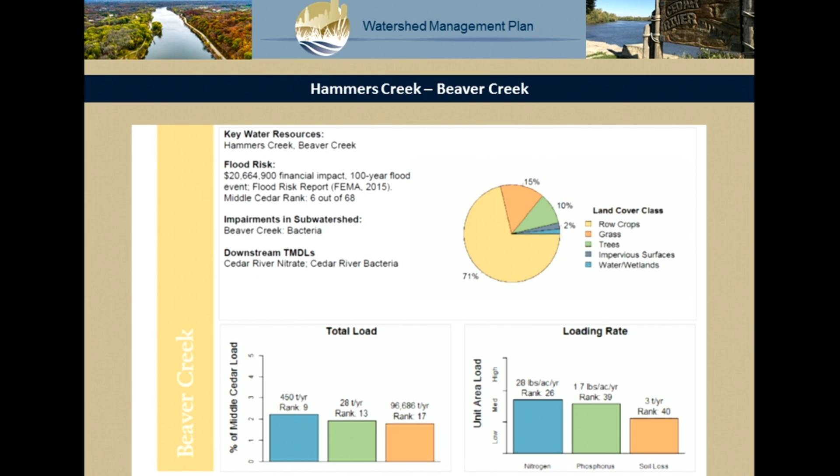From that, we have a workshop with the leadership of the WMA to establish goals for the future. What do we want to see? Do we want to see reductions in nitrate? Do we want to be able to swim in our waters? Do we want to be able to drink them safely? Let's set some goals for that future, for water quality, flooding, and these other issues.

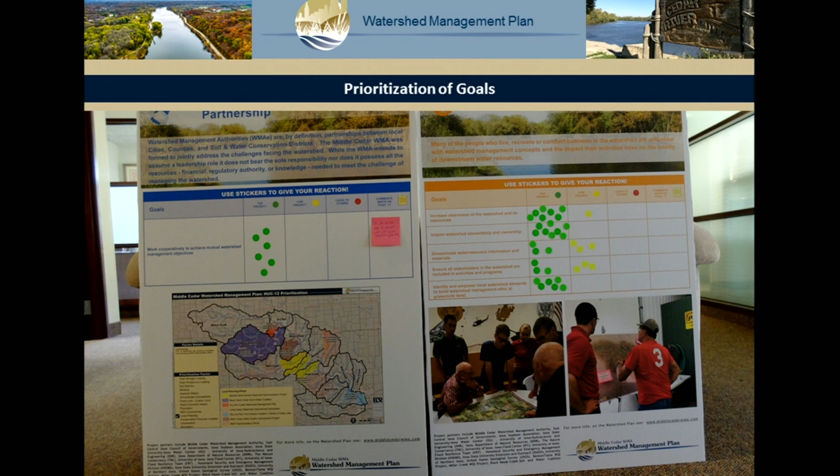From that, we go back out and had another series of stakeholder meetings, open houses, conversations with the community to get their take on those goals and prioritize them, really fine-tuning the goals and objectives that the WMA board developed.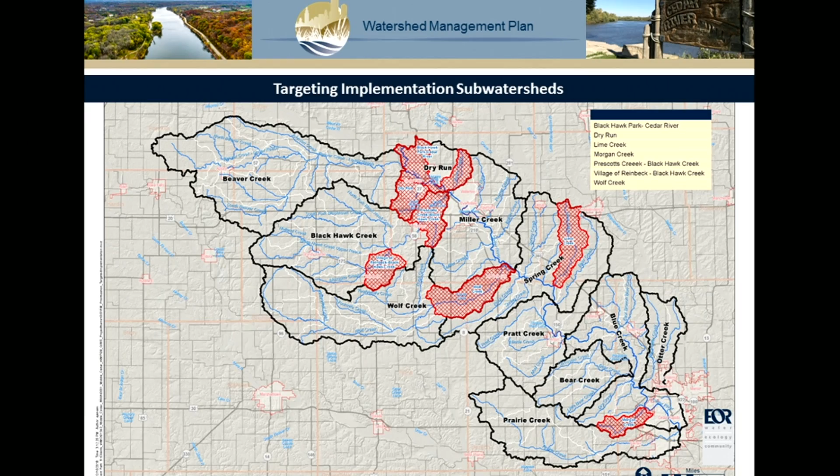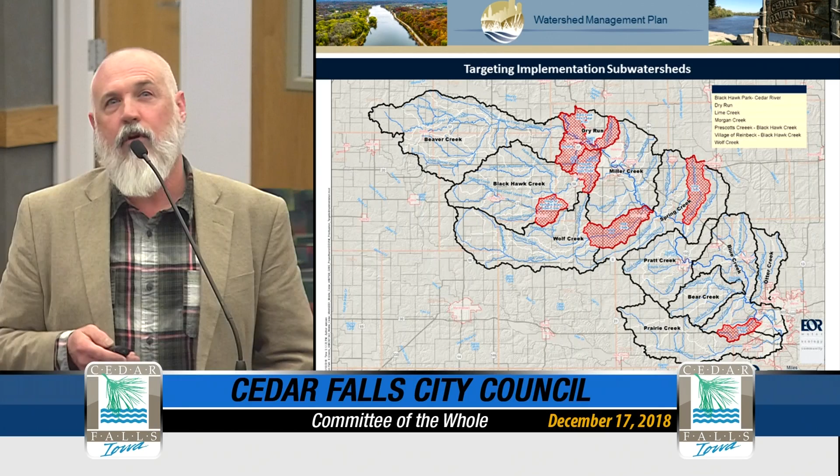Finally, we pull that all together, identify all the issues of concern, all the priority goals, all the priority issues, and came up with a targeting exercise that we led the watershed board through: if we stack all of those important resources and issues, where are the specific areas within the watershed we should be targeting first? You can see in this map of the entire Middle Cedar, many of those high priority targeted subwatersheds are in the Cedar Falls, Waterloo metro area, with a few more scattered throughout the watershed. Those are the areas that the Watershed Management Authority should focus on first.

We also led the WMA through an exercise of how do you see getting your work done? What kind of mechanisms for implementation do you see being the most effective and most appropriate for the WMA? They identified cost share and watershed coordination, education, and outreach as being those most critical tools.

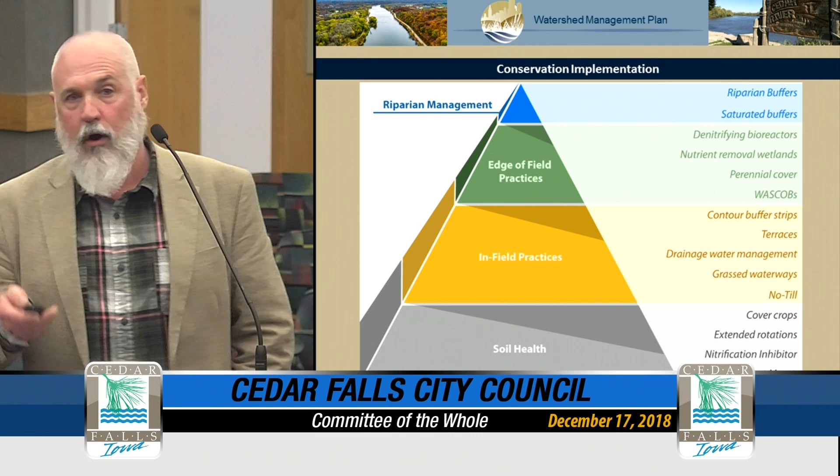Moving on into conservation practices and the implementation phase of our recommendations, Larry alluded to a lot of these practices, but we think in terms of conservation in agricultural areas as a conservation pyramid, where the base of that pyramid are those practices that build soil health. Then we move on to infield practices, edge of field practices, and then riparian management, which would be the stream buffers and those types of things you hear talked about a lot.

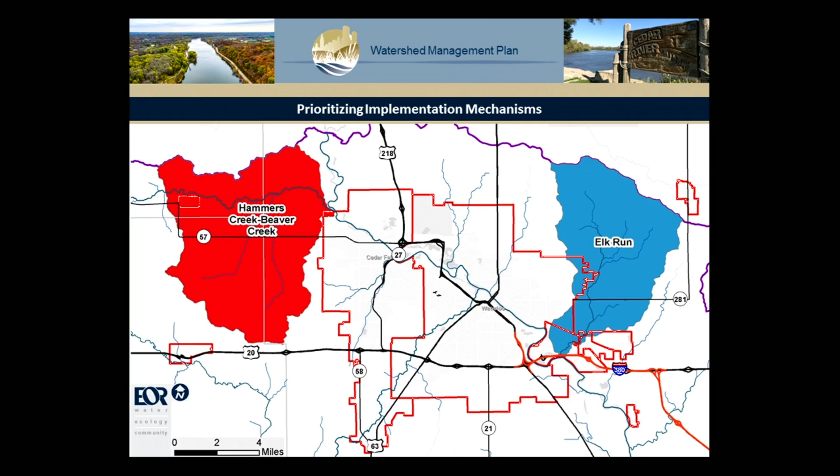So again, moving back down to that subwatershed scale, I'll run through an example of that Hammers Creek, Beaver Creek subwatershed to your west. We've developed a specific conservation scenario for that subwatershed based on its specific characteristics, and come up with an estimate of what it would take to meet the Iowa nutrient reduction strategy in terms of putting these conservation practices in the ground.

You can see we've got agricultural BMPs, and in subwatersheds that hit municipal areas, we've got urban BMPs as well. So you can see kind of that 20-year annual cost in the order of $1 million per HUC 12 for this specific HUC 12 to meet that Iowa nutrient reduction strategy. That's made up of all the conservation practices Larry talked about, as well as practices like cover crops and extended rotations.

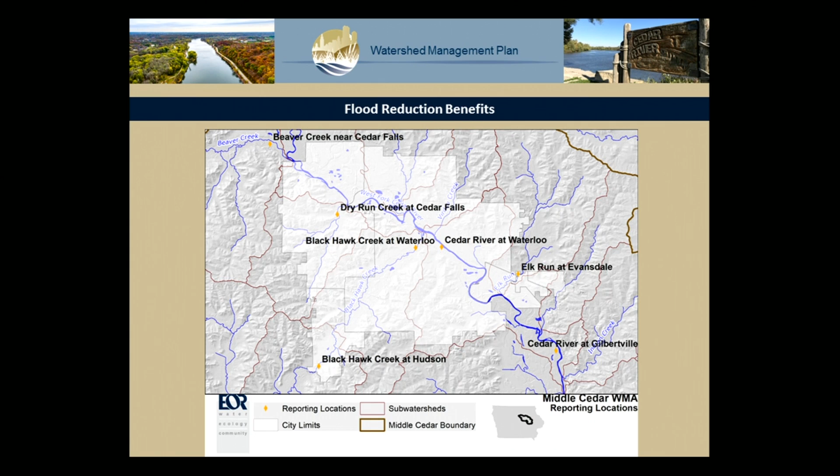I'm going to skip through the Elk Run example. On the flip side of this, that's our investment in water quality, but we also get a benefit in terms of flood reduction. So we've done an assessment and evaluation of what that benefit in flood reduction would be if these conservation practices are in place.

In the case of the Hammers Creek, Beaver Creek subwatershed, our evaluation looks at a specific flood event that occurred in June of 2013 - a fairly significant flood. Our modeling shows that if these conservation practices had been in place, it would have been on the order of $2.8 million in savings in terms of flood reduction losses, as a result of a 0.4 foot reduction in that flood event.

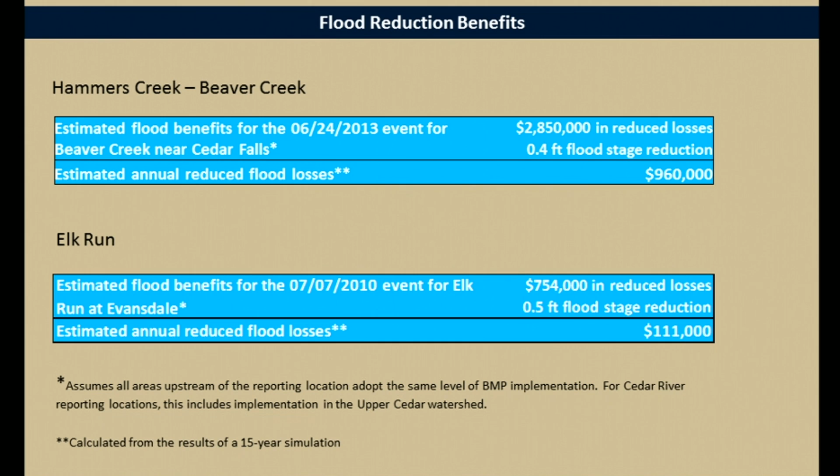We can make an annual estimate in terms of the return interval on these flood events and calculate that that's on the order of almost $1 million of savings on an annual basis as a result of these conservation practices in terms of flood reduction.

So that's the overview of what will be in the watershed management plan. We're finalizing it right now. It will come back to you in early spring of 2019 for your approval. As the Iowa Watershed Approach kind of sunsets, the WMA is left to pick up that energy and move into implementation of this plan into the future.

So appreciate the membership and the involvement we've had from David on the WMA board - it's been wonderful. I just wanted to come in and give you guys an overview of the watershed.